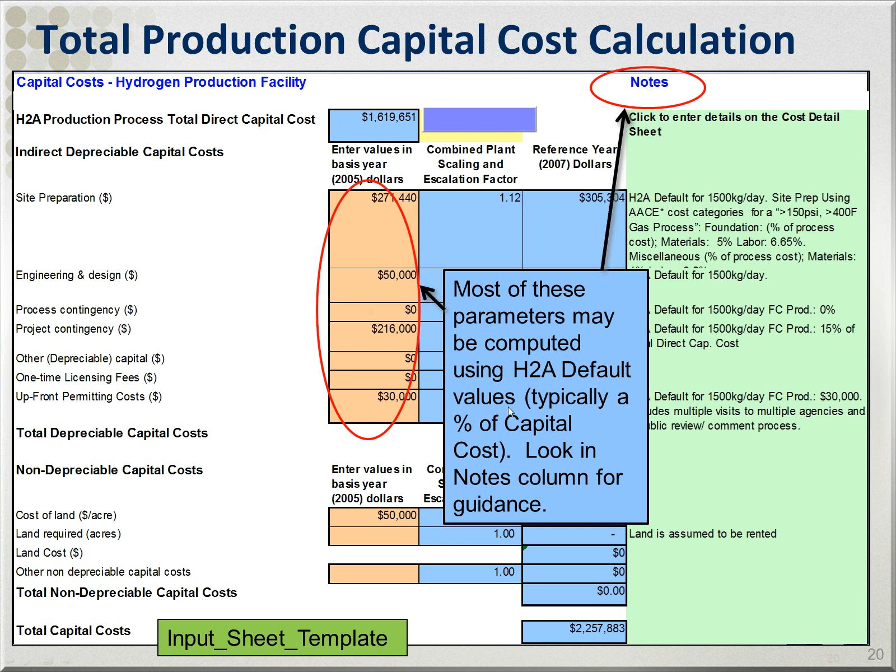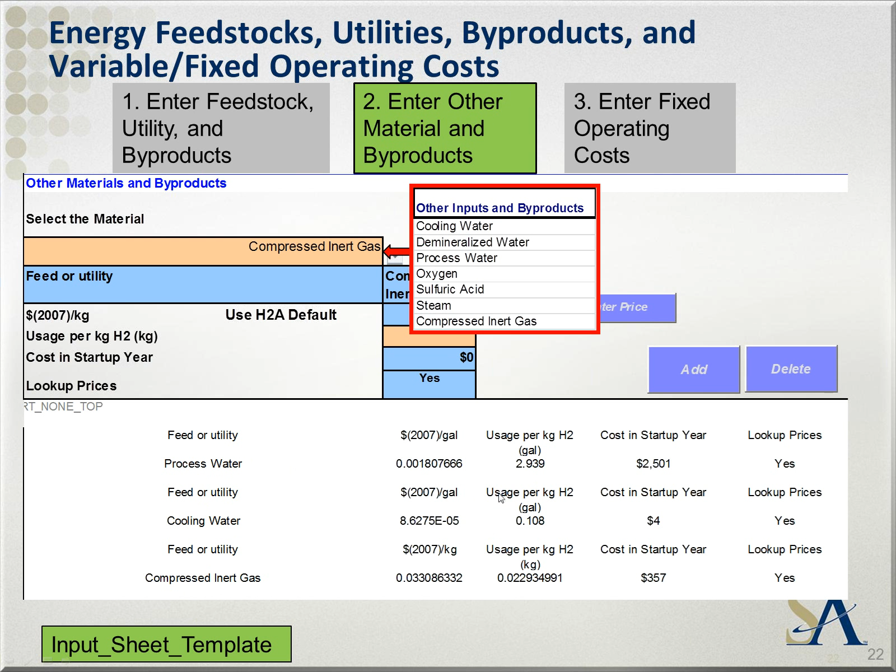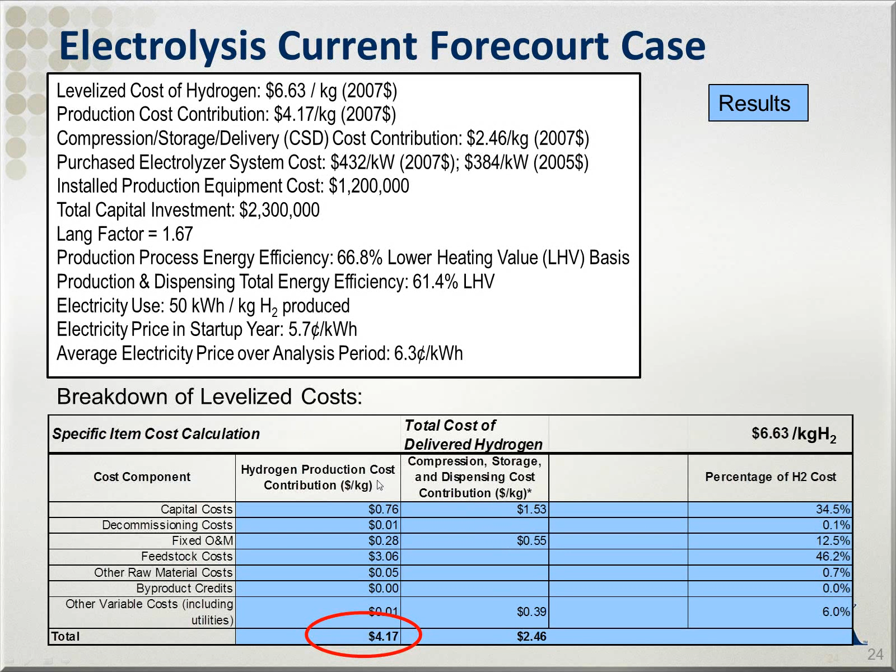The model also does compression, storage, and dispensing for forecourts, but we're primarily interested in production here. These are the categories it breaks them down into as standard pieces, and then sums them up into this projected cost of $4.17 per kilogram of hydrogen.

Also as outputs are the tornado charts, which it does automatically. The data is entered on the sensitivity analysis tab, and the way tornado charts work is there's a base cost—this is the levelized cost of hydrogen here as the center line. Then, independently for each critical parameter, you postulate a low value and a high value, compute the cost per kilogram, and type it into the chart below.

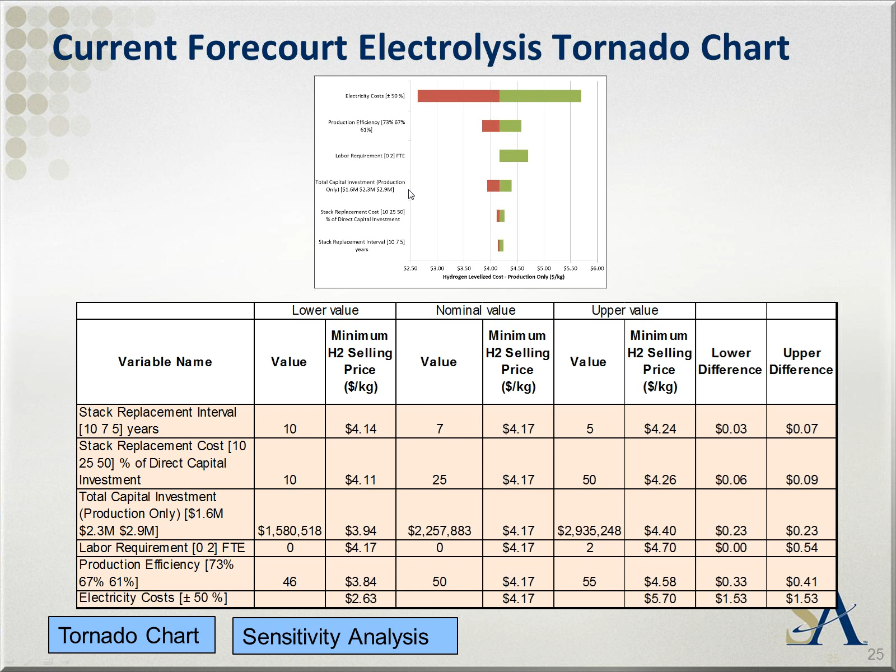Then the macro within the H2A model automatically creates a tornado chart for you, drawing the widths based on the data in these peach-colored cells that are entered there. So you don't actually have to figure out how to do the offsets for the tornado chart—it does it for you, down here, for your convenience.

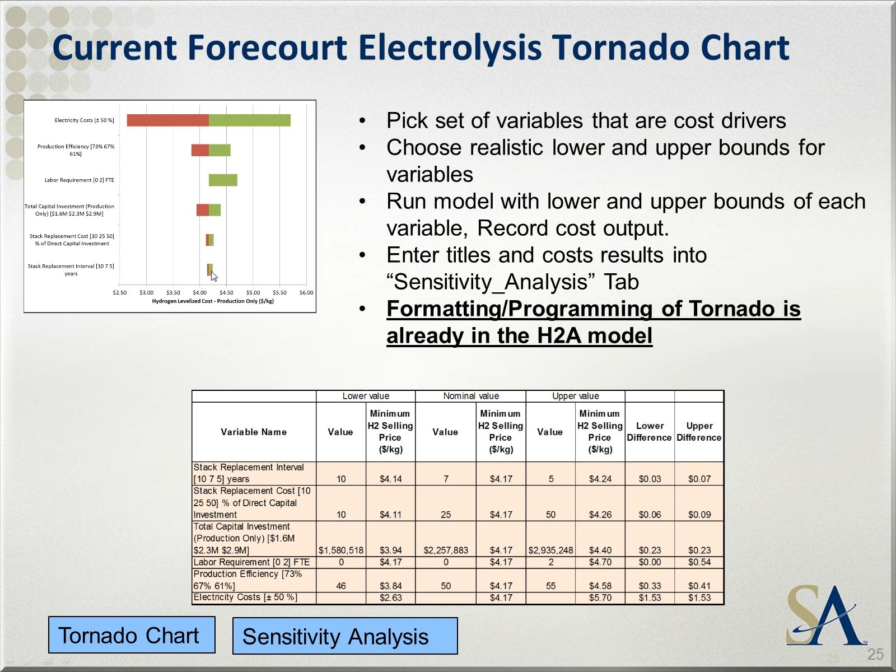You may have to reorder the parameters here to get the tornado shape, with the widest, most sensitive parameters on top and the least sensitive parameters on the bottom. That's easily accomplished.

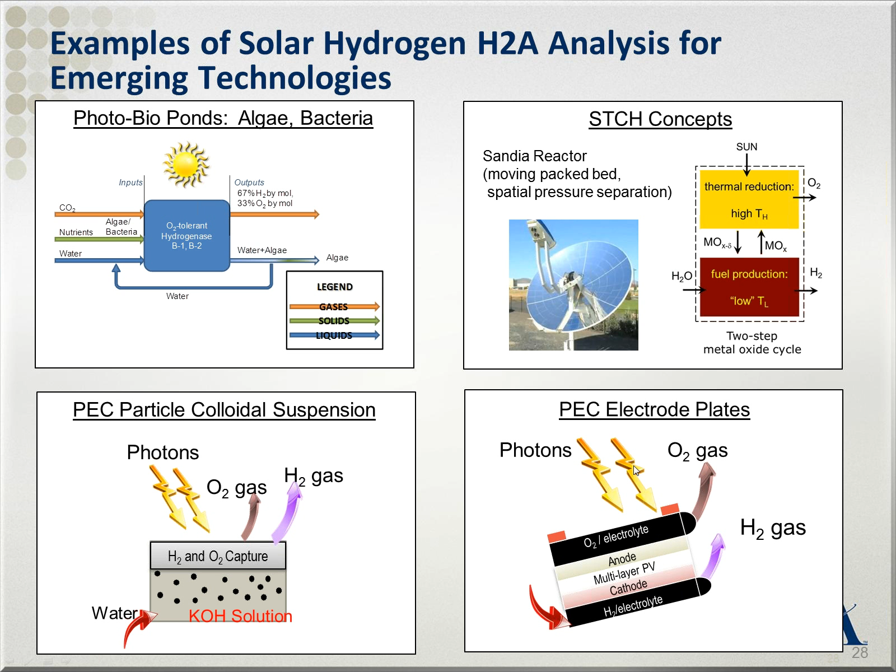The sunlight causes oxygen to evolve on one electrode and hydrogen gas on the other. So it is water splitting, but it's PEC water splitting.

Let me talk briefly about some STCH concepts. This is a solar dish concept that was done in a case study, based on a design by Sandia. It involves individual dishes with a STCH converter system at the focal point.

But as prep work into the H2A analysis, one had to consider the overall size of the plant being modeled, how many dishes it would take, what the spacing of the dishes is, how much land it encompasses, and the size of each dish, because it affects the capital cost of the dish and also of the converter.

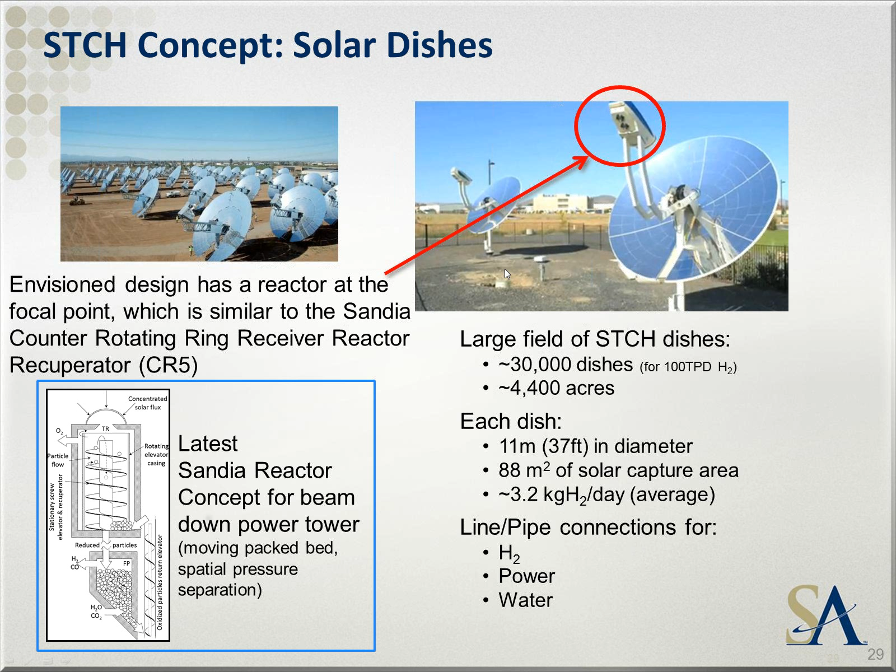And one also has to consider the lines and piping connections to connect the dishes to each other and to collect and manifold the product and the feedstocks.

So following on with the solar theme, the STH efficiency, which stands for solar-to-hydrogen energy conversion efficiency, is a critical prime parameter for all of the solar cases. Simplistically, it is the lower heating value of the net hydrogen—not gross, but net—that you get out of the system, divided by the total solar input into the collector system.

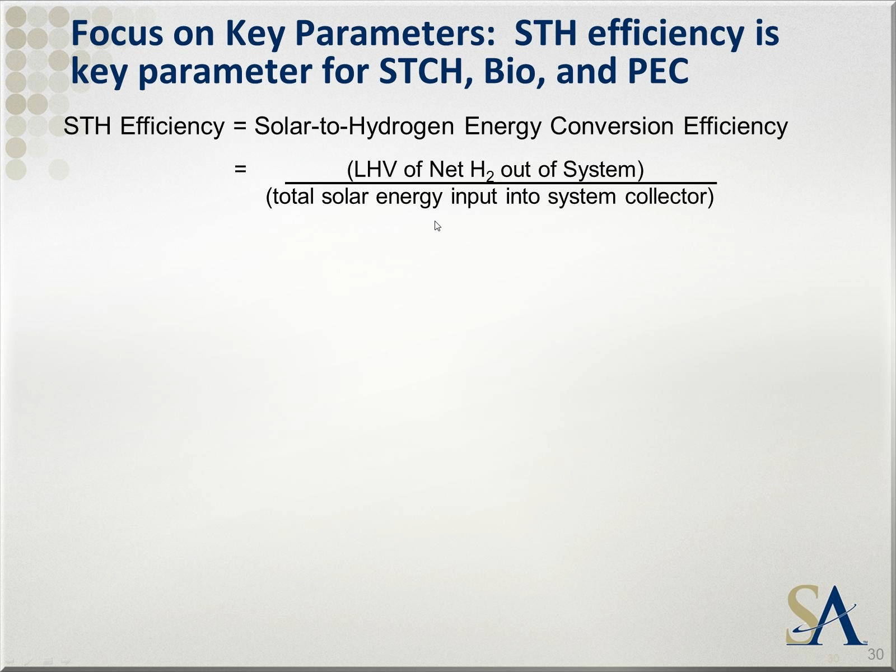However, each of these terms has a bit of a nuance associated with it. The solar energy must be the full spectrum energy into the system. You cannot choose the wavelength that you want to include in the efficiency calculation. It has to be full solar spectrum, even though many systems only react to specific wavelengths.

And secondly, for purposes of the efficiency calculation, we're not interested in the photons that hit the ground in between the collectors or in dead parts of the collector. We're really capturing the full active area of the collector system, not the space in between.

Additionally, you have to make sure that your major terms are consistent with each other. It's common sense, but it bears repeating. There are solar energy and intensity assumptions that need to go into your system. You should consider and be mindful of the direct versus indirect insolation effects. If you have a concentrator system, you can pretty much only use the direct energy. The total direct and indirect is included in the efficiency calculation, but in terms of what is useful to you, it's really only the direct component.

You have to consider tracking, because that affects insolation, as well as potential blockage, which affects the potential spacing of systems next to each other. Collection area is obviously tied into solar intensity, as well as the conversion efficiency. Capital cost has to be scaled appropriately for your system, and you have to size the systems, in general, for peak hourly production.

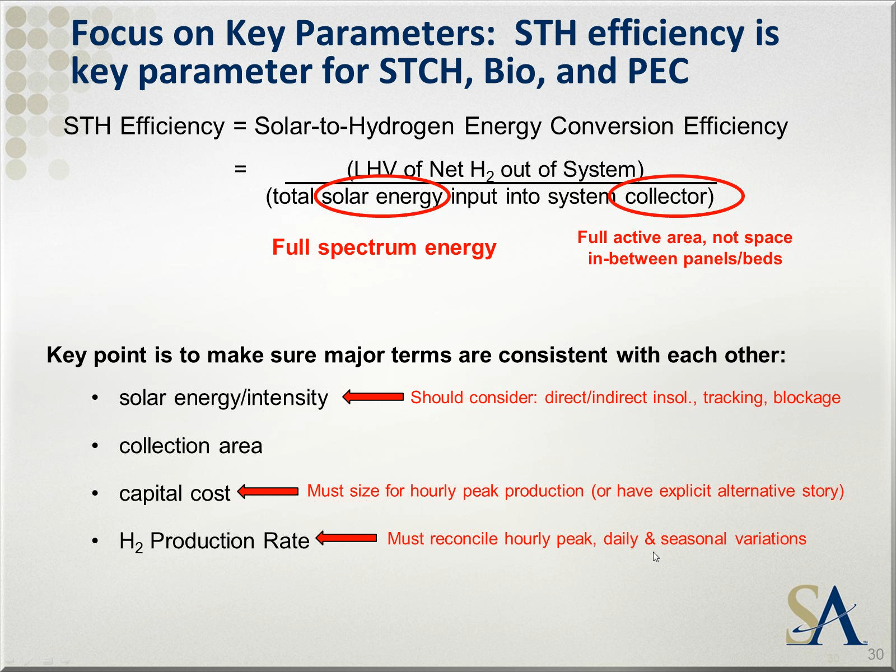With that in mind, your hydrogen production rate is mostly referred to, but not necessarily exclusively, as a yearly average. That's the shorthand we use for hydrogen production, although the capital costs need to be scaled for peak production. So you have to reconcile the hourly peak as well as daily and seasonal variations, both for the hydrogen production as well as the capital cost associated with the system.

Well, STH efficiency is the key metric. We want to know more. We want to understand how you derived that STH efficiency, and so we suggest that you break down STH into the appropriate component efficiencies and define exactly what you mean by them and explain what the basis is.

This STCH example breaks it down to the optical, receiver thermal, and reactor conversion, and then has a product going up to 6.2%. One also has to break it down by year for the case studies, and so we want to be able to compare how the individual component technologies advance in the future and to generally increase the STH efficiency, shown here in the example.

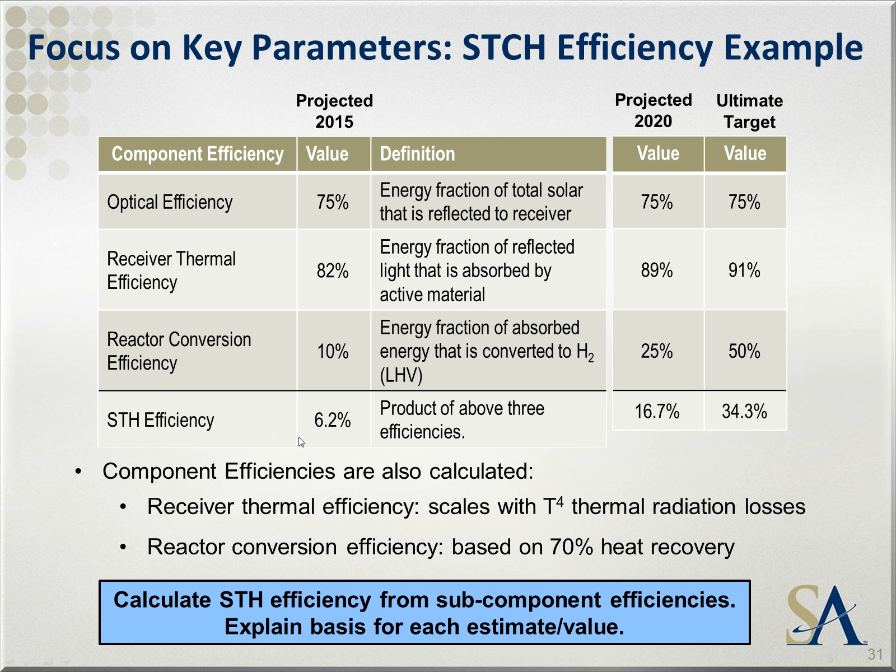So by all means, break it down into the appropriate sub-parameters you have, but also report the macro metric. You're encouraged to include supporting calculations as an added tab at the end of the workbook.

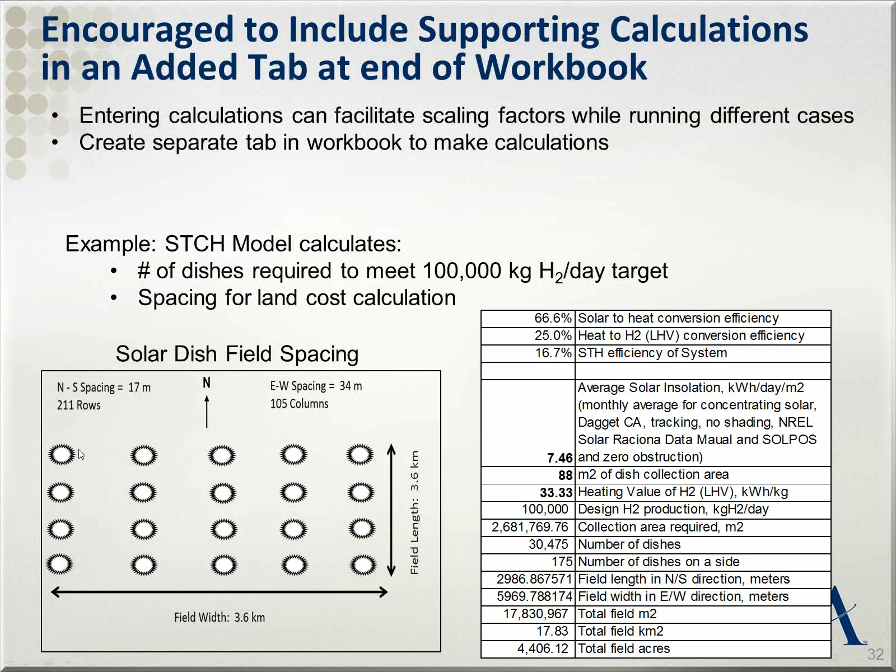This is an example that the Sandia guys did for an STCH model. They calculated the actual spacing between the solar dish arrays out in the field to avoid blockage. They did this in a separate spreadsheet.

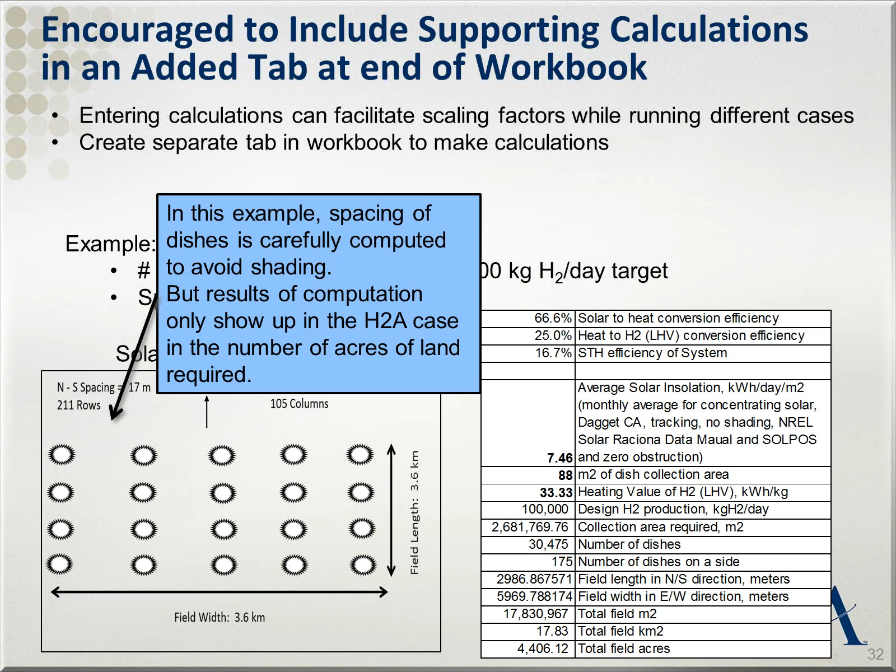And really the only results that go into the H2A model per se numerically is the amount of land that is required for their array. Because the model doesn't really care what the spacing is, but it does care how many acres of land it has to buy to support the plant.

If you don't want to do it in the Excel tab, you can alternately use a Word document, as was done here, to further explain and show the basis of your assumptions.

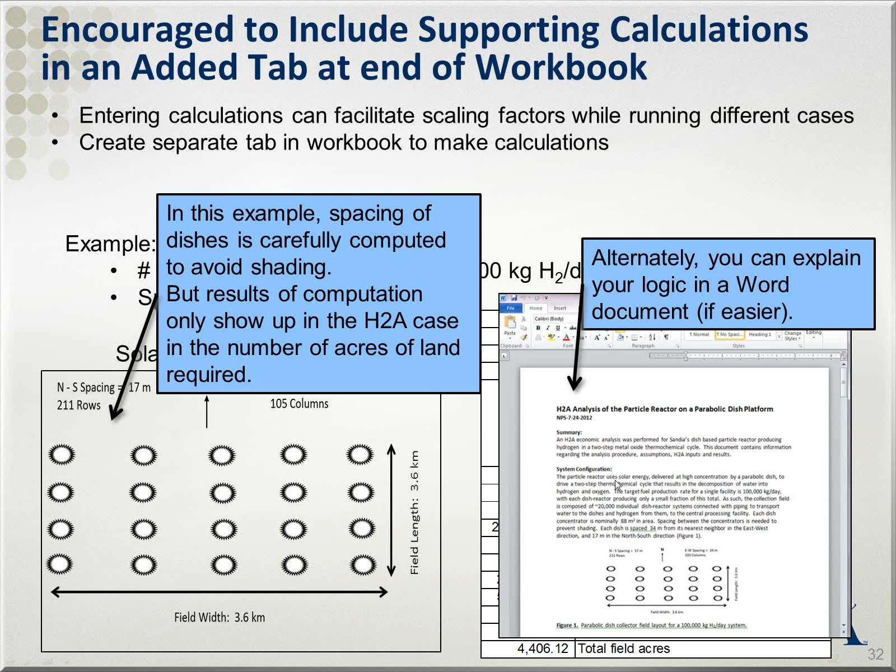And finally, the DOE in their MYRD&D plan, which is hard to say, has a series of technical target tables. These are, in general, broken down for each of the technologies, each of the main technology types. And they're broken down into two types of tables.

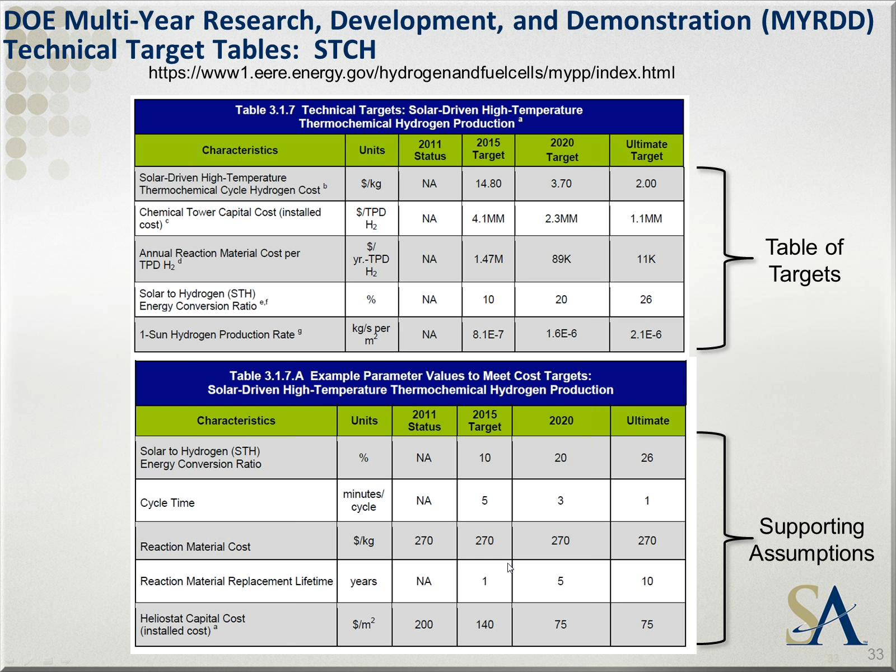They're guidelines or suggested metrics that you can compare against that show one possible method of achieving the top metric, but there are other ways that you're more than willing to pursue. You just have to explain what you're doing. But they are included here just to give you guidance into what DOE is thinking and a potential pathway to achieving the upper metrics.

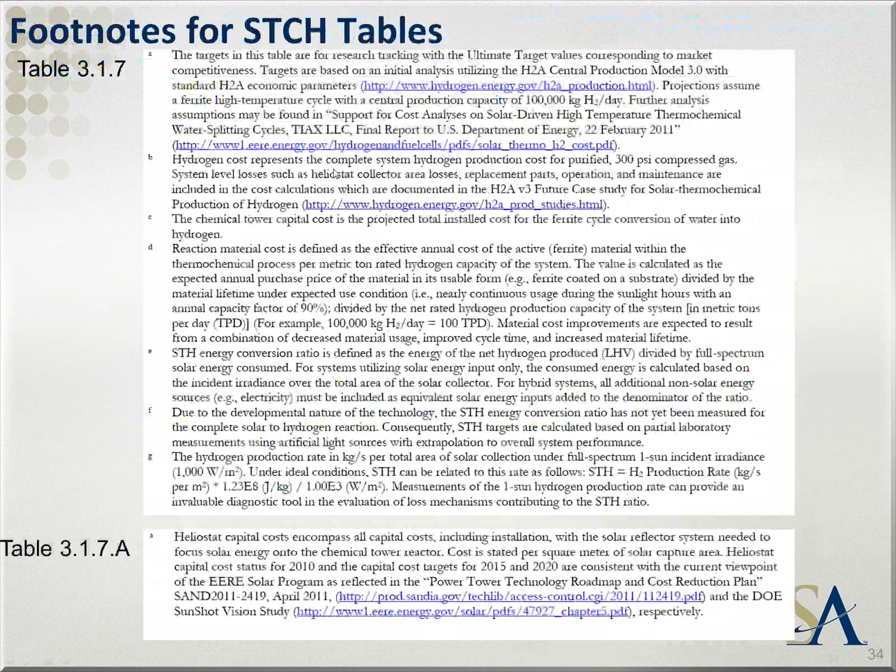Each of the tables, as you see here, has lots of footnotes attached to it, and these copious words appear in the MY R&D plan to describe the details that went into each of the metrics and the assumptions, and they can be quite lengthy.

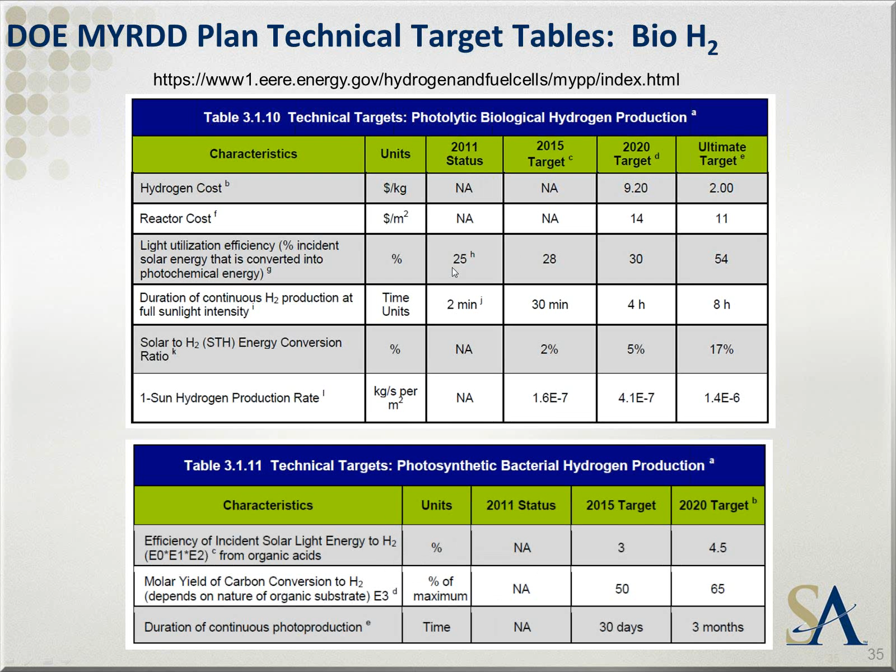This is the bio table. I won't go into the details here, but it is likewise configured with a table of metric targets as well as some supporting assumptions that feed into the metrics along here. The footnotes for the bio tables run 2 pages of them.

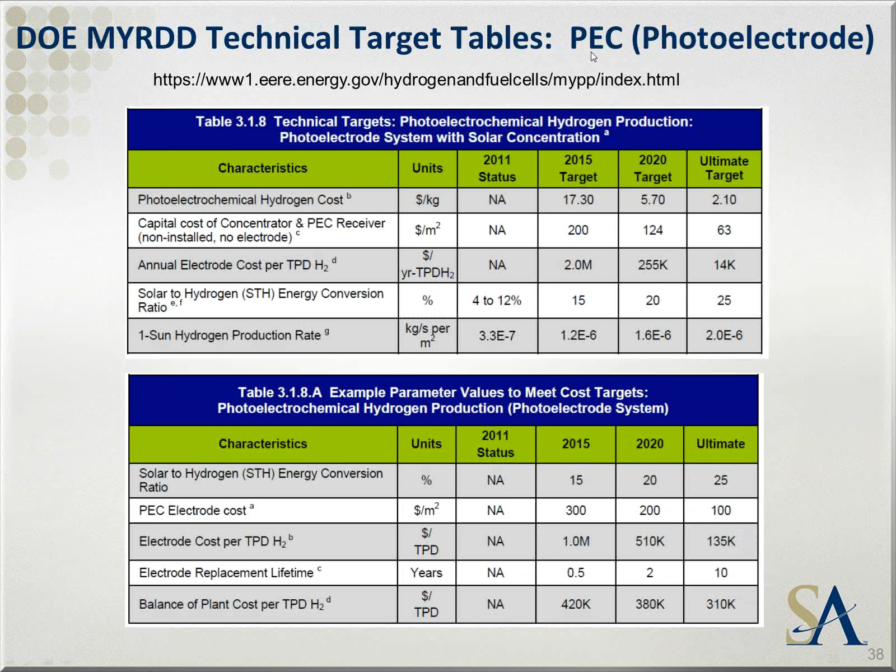Then there is a table for the PEC photoelectrode as well as a table for the PEC colloidal suspension system, which has a further specification of being a dual bed system as opposed to a single bed system. A single bed system would co-evolve hydrogen and oxygen in the water splitting reaction. A dual bed system has 1 bed for hydrogen evolution and 1 bed for oxygen evolution.

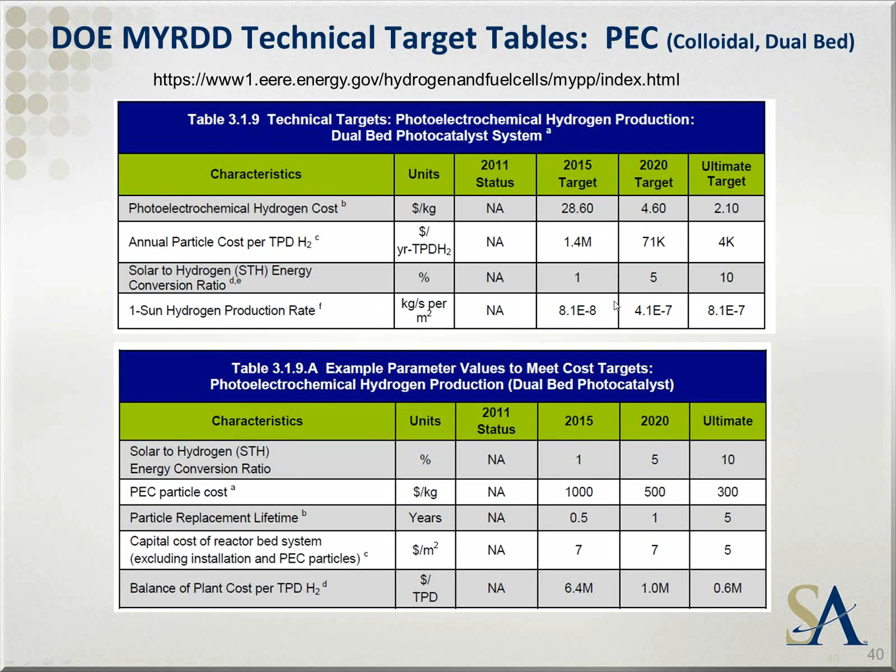So it's showing the specificity of it that would not necessarily affect the overall target table for the system, but it would certainly have an impact on the supporting metrics down below.

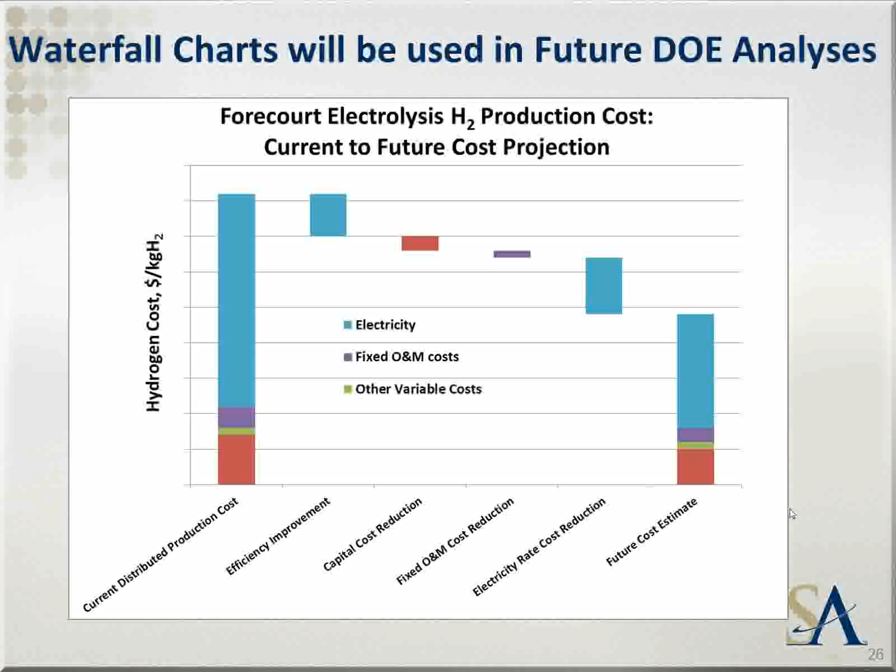The first question is as follows: I have a project idea for an offshore platform for hydrogen production with energy from wind, sun, tide, and hydrogravity. Where can I find help?

Where can you find help? That is a broad set of technologies that you have there. I would direct you to the DOE websites, which derive from the various websites shown on the last slide, that have case studies for each element of those. I think there are also DOE documents for various constituent technologies, say from the wind office, that would have perhaps other parameters. But holistically, you're going to have to combine the H2A analysis with side calculations to make sure that all of the pieces fit together, because there's going to be a lot more specification required for a complex technology system like that, combining elements, than need to go into the capital costs and the manpower aggregate numbers for the H2A page.

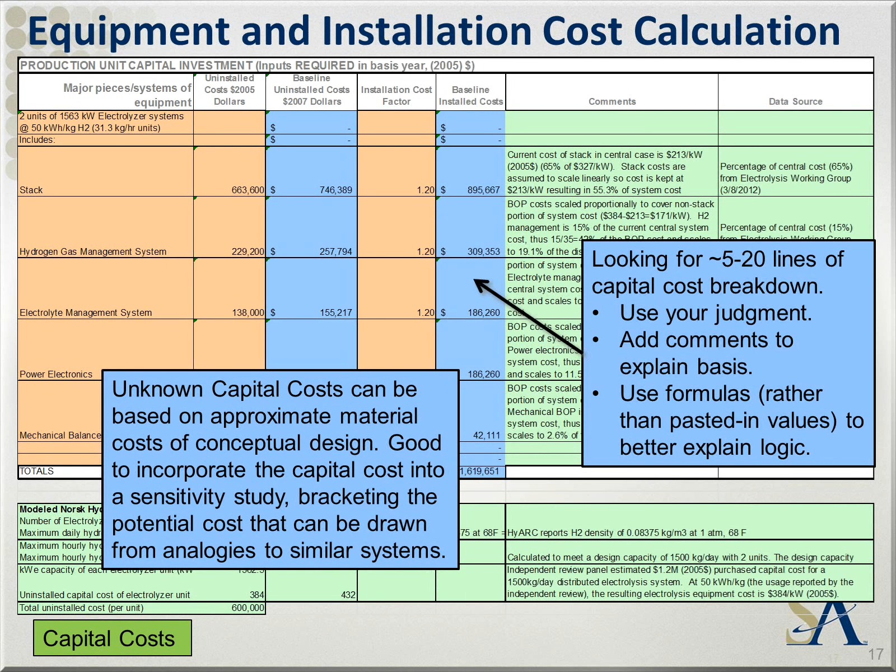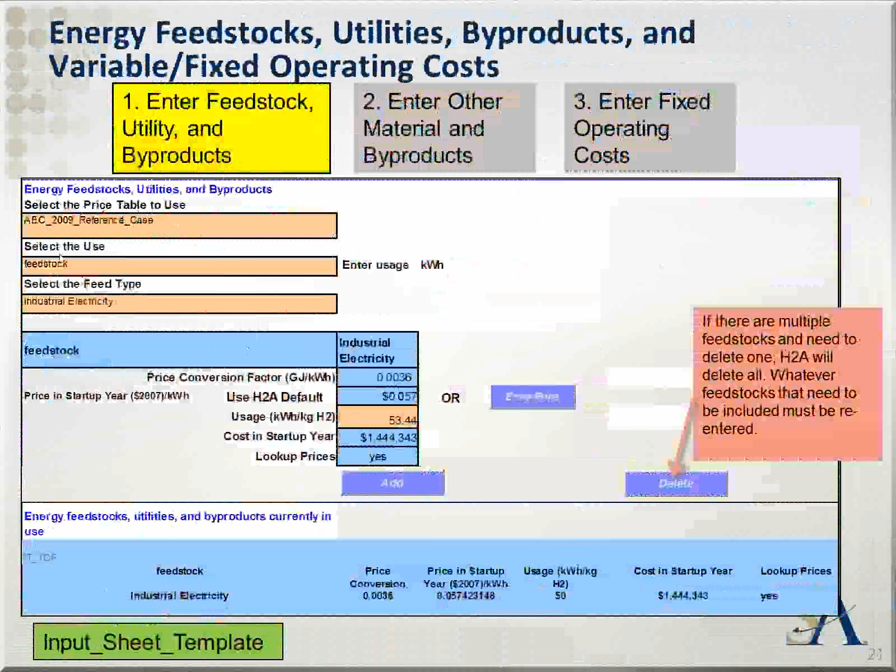Yes. So once again, when you're adding in the feedstocks, you can add in a utility feedstock or industrial—it doesn't really matter which one—but you're going to be changing the lookup prices setting from yes to no, and there's a way to do it when you click on it. You can say no. When you do that, it will prompt you for the price of electricity. The cell, instead of being a blue value from the data tables in 2007 dollars per kilowatt hour of electricity, will change to a peach color where you type in a constant price of electricity, and then it will use that. Obviously, if it's zero, it doesn't mean anything. But to support whatever value of electricity you put in there—and I think it has to be a constant value rather than a schedule—you need to do a side analysis showing your assumptions and justifying the use of that electricity price. That will be a key component, because with electrolysis, the price of electricity is the key determining factor of the cost of hydrogen. So you have to have a solid basis for that price of electricity.

All right. Thanks, Brian. Let me go through a couple of hopefully quick questions, and I'll come back to the more lengthy ones, or the answers may be more lengthy. Let's do the quick ones first.

One question is, what does forecourt mean or stand for? So the forecourt is the term of art for current gasoline stations. I think it specifically refers to the tarmac where the cars pull in to be refueled. Obviously you're just dispensing gasoline in the gasoline station from an underground tank. In our forecourt stations, for these production cases, you're actually producing the hydrogen at the station itself, and then storing it and dispensing it to the vehicles. So forecourt is meant to be the roughly 1,500 kilogram per day dispensing station where hydrogen is also produced at that location.

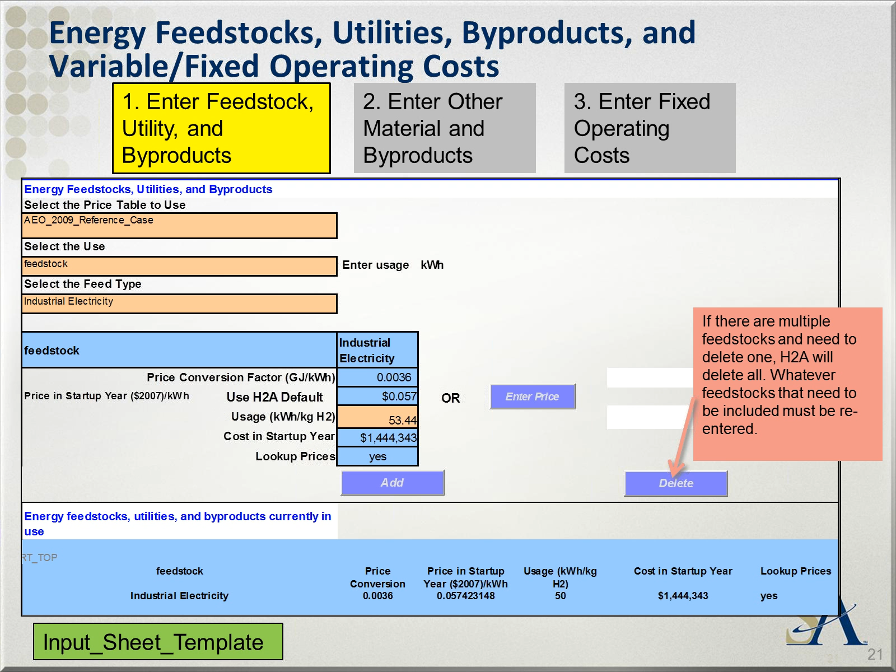You knew that was going to come up, right, Brian? Yeah, it very easily could be. It was somewhat of a legacy because it was an update of a model that had been done earlier, and therefore I think the years of the analysis were maintained to allow comparisons to other cases. But because of the automation within H2A, it would be a trivial update to change the base years.

That's the reference year, right? So that's not the base year, though, right? Excuse me, the reference year. Yes, I misspoke. Specifically not the base year—the reference year is what I meant to say.

We'll see if more questions come up on that one. Let me give you one I think you can answer with a little bit of finesse. Does the DOE $2 per kilogram target reflect approximately gasoline parity for the current generation of fuel cell electric vehicles? If so, where is SMR and what is next?